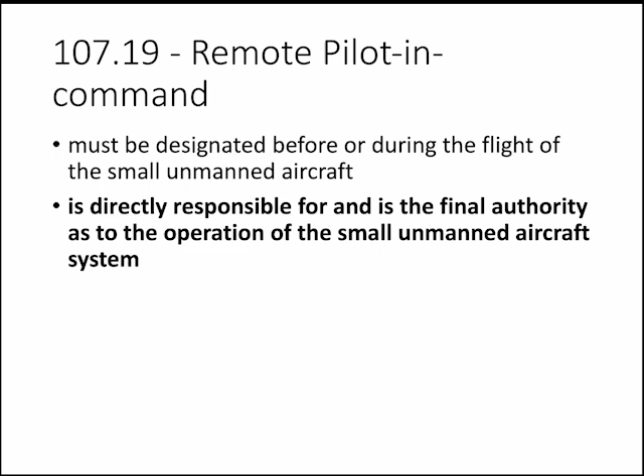So the RPIC doesn't have to be the pilot. There could be a pilot and someone else who is the person who's responsible. But the RPIC is the one who's going to be responsible for everything that happens and makes the final decisions about what to do in the event of any emergencies or anything like that. The RPIC has a number of requirements. You have to meet certain requirements as the RPIC.

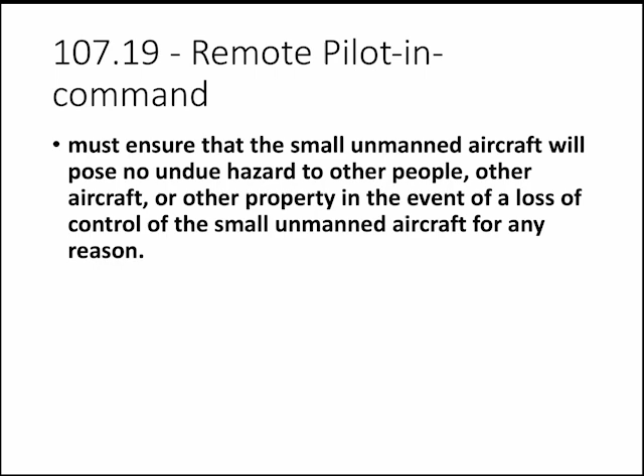Number one, you have to make sure that your drone is not going to pose a hazard to other people, other aircraft, other property. And the way that I think about this is that if the worst happens and your drone falls out of the sky, would it hurt someone or something? And if it would or does, then the remote pilot in command is going to be the one who is responsible for that.

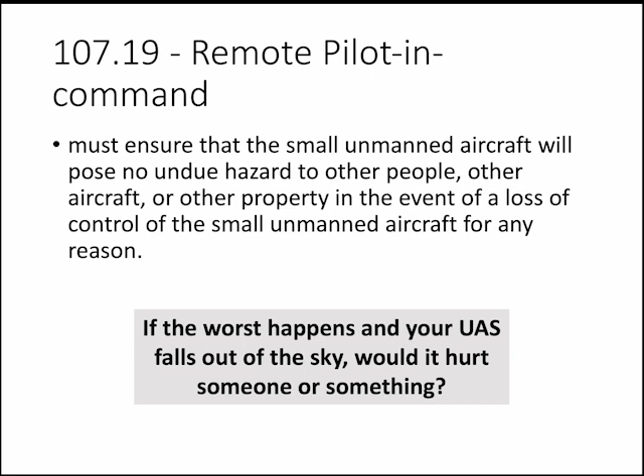The RPIC must have the ability to direct the operations, make sure that the drone is complying with all the regulation. Now, as you may have noticed before, it's actually possible to designate two remote pilots in command for a single mission and for one RPIC to transfer to the other, as long as you can maintain line of sight and there's no loss of control and things like that.

This happens where maybe you're flying over a larger area where maybe it wouldn't allow both pilots to see the airplane in the entire flight. You can transfer the flight to another remote pilot in command as long as you can both see the aircraft when you do the transfer, and then the other remote pilot in command can take over and fly the aircraft maybe farther, or maybe you're taking turns controlling the aircraft, whatever it might be.

So you can have two RPICs and they can transfer as long as you can maintain line of sight from both RPICs at the time of the transfer and there's no loss of control.

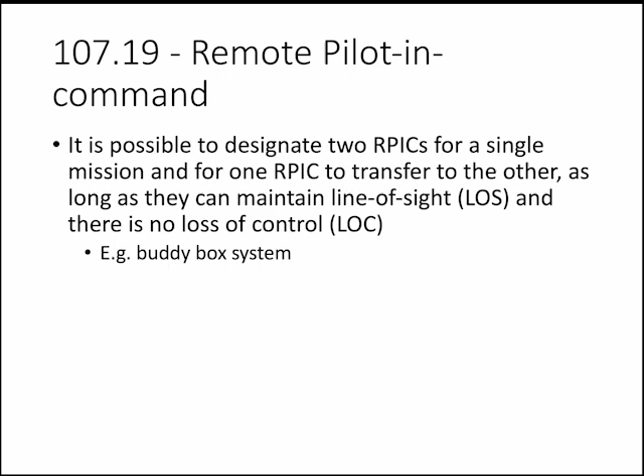The remote pilot in command may deviate from any of the rules and regulations that we've talked about to the extent necessary to meet an emergency. So in an emergency situation, the RPIC basically is the one to decide, hey, we're going to do this, even though maybe technically it's against the rules. This is going to be the safest thing to do in this case. The RPIC is the one who's allowed to make that decision. But of course, that means they're also responsible for anything that happens as a result of that decision.

And the FAA administrator is allowed to require them to complete a report about what happened and why they did what they did. Note that this is only upon request. It doesn't mean that if you deviate from the rules in an emergency, you have to send a report to the administrator. Just if it happens and the administrator requests it, then you have to.

Okay, so that's a lot about the RPIC, the remote pilot in command, a very important position which needs to be specified for every flight that you make. And again, maybe in many cases it'll just be yourself if you're the one flying the drone, but if you're working with several people, then you'll have to designate that.

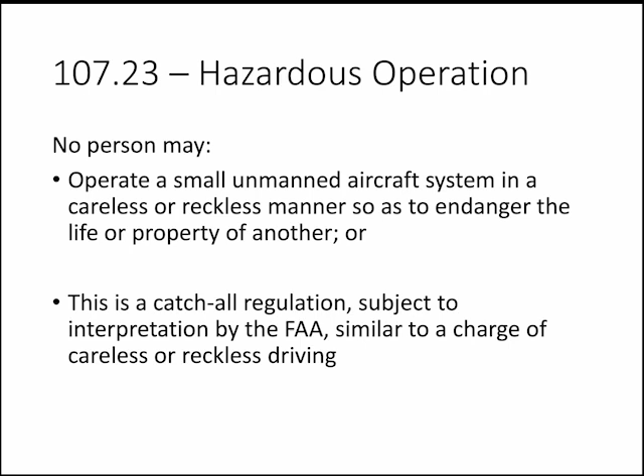Now, just a few general things about remote or UAS, UAV operations. Obviously, you can't operate in a manner which endangers the life or property of another. This is kind of a catch-all regulation.

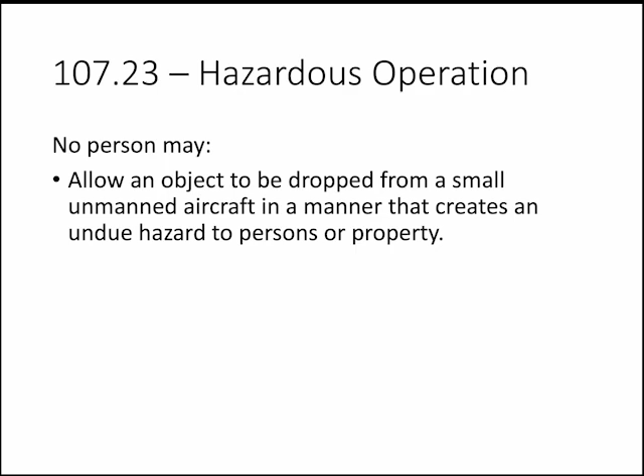You're not allowed to drop an object from a drone if it's done in a manner which creates an undue hazard. And again, this is kind of subject to interpretation. But basically, the FAA is expecting you to use common sense, to use good sense about what situations might be hazardous to other people or property.

You are actually allowed to operate a UAV from a moving vehicle or a waterborne vehicle, if you are in a sparsely populated area, a rural area, and you are not transporting another person's property for hire or compensation. You're not allowed to fly a UAS from a moving aircraft, and you're generally not allowed to fly from a moving vehicle, but if you're in a rural or remote area, a sparsely populated area, then you are allowed to.

And this might be the case where maybe you are flying a drone and you want to move to another location so that you have a better view of the drone. You can do that if you're in this sparsely populated area while the drone is flying.

But again, this is a little bit subject to interpretation because who defines what is sparsely populated? The FAA doesn't have specific numbers of people per square kilometer or anything like that. So just keep in mind, again, use good sense, use good judgment about what constitutes a sparsely populated area.

Alcohol and drugs. So you cannot operate a UAV while under the influence of alcohol or drugs. And the FAA takes this very seriously. Actually, these regulations are the same or similar for manned aircraft. And the legal limit is 0.04 grams per deciliter of alcohol concentration in blood. Or equivalently, you need to be past 8 hours after the consumption of any alcoholic beverage. And obviously not using any drugs.

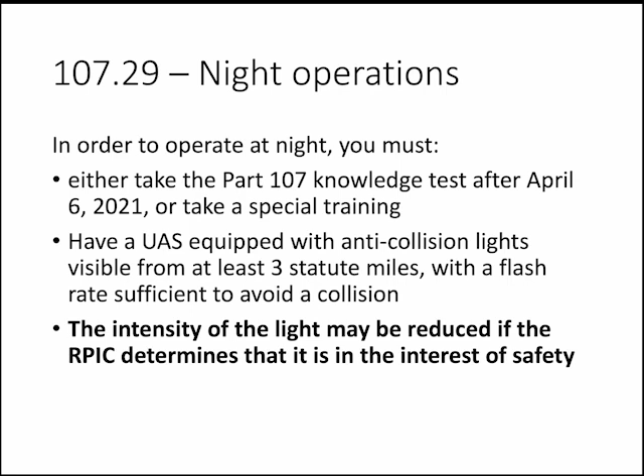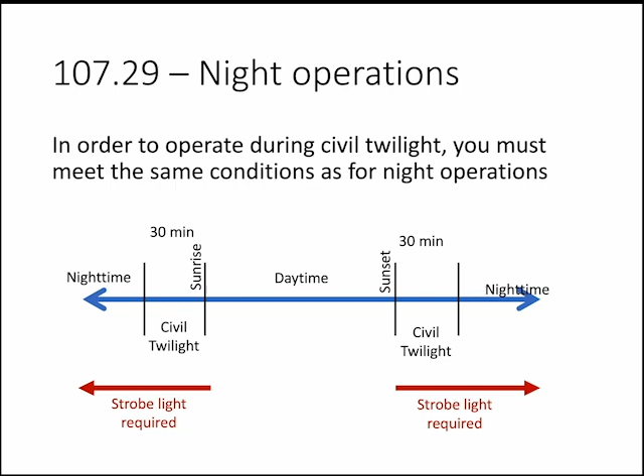Okay, so there's that graph that we looked at, and here is where I'm showing, doesn't matter if it's civil twilight or nighttime, you're going to need those flashing lights that are visible from at least 3 statute miles away during those time periods. All right, so let's talk about visual line of sight.

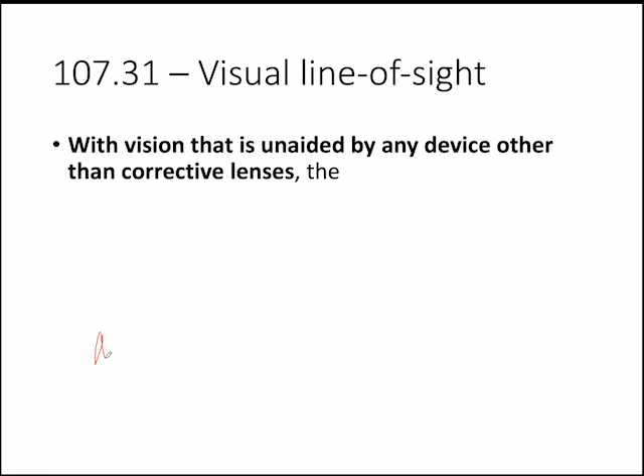When you're operating the unmanned aircraft, you're going to need to be able to maintain visual line of sight. And that means if I am over here operating my drone, this is supposed to be a drawing of me, not a very good artist, I apologize. But here we are, here's my drone. This is supposed to be propellers on the end of the drone. And there's my camera, I'm taking pictures.

So I need to be able to maintain direct visual contact between myself and the drone at all times during my flight. And the only thing that I'm allowed to use to maintain visual line of sight is prescription glasses or prescription contacts that I'm wearing. So binoculars are not allowed, telescopes are not allowed. Anything other than your regular prescription lenses that you wear normally is not allowed.

You must be able to see the drone from where you're flying at all times during the flight. And as we said, in some cases you may move around so that you get a better view of the drone, and that's fine under those specific circumstances, but you have to be able to see the drone. So in other words, let's say this is a hill and I'm flying. If I put my drone over here, now the hill is in the way, and my drawing is getting worse and worse, I see. But anyway, the hill is in the way now. I'm not able to see it.

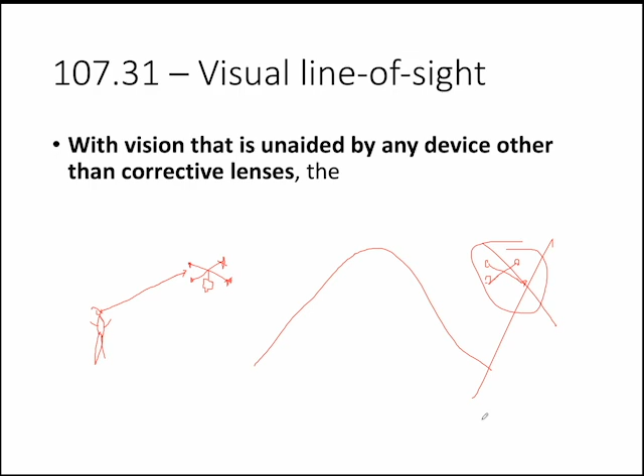So I might be able to walk around to the side of the hill where I could see the drone. And as long as I can maintain visual line of sight during the entire flight, that's okay. But if I was to stand over here and then have the drone over here, that's not okay. So let's draw a circle and a big X. Don't do that. That's violating the visual line of sight regulation.

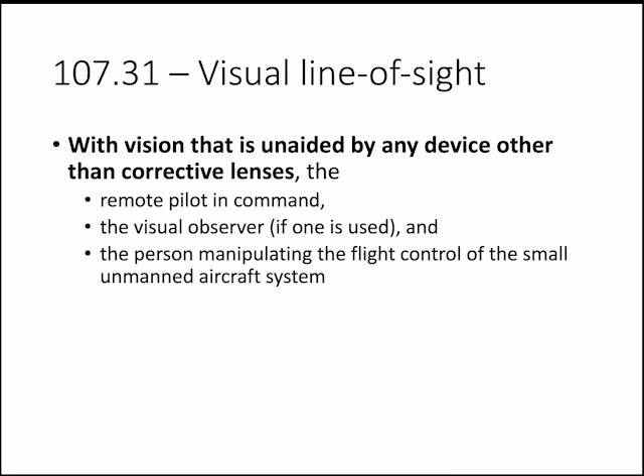And it's not just the remote pilot in command that needs to be able to see the drone. If the person who's actually piloting the drone is different from the RPIC, they also need to be able to see the drone at all times. And if you're using a visual observer, they also need to be able to see the drone at all times, visual line of sight. So you must be able to see the unmanned aircraft throughout the entire flight.

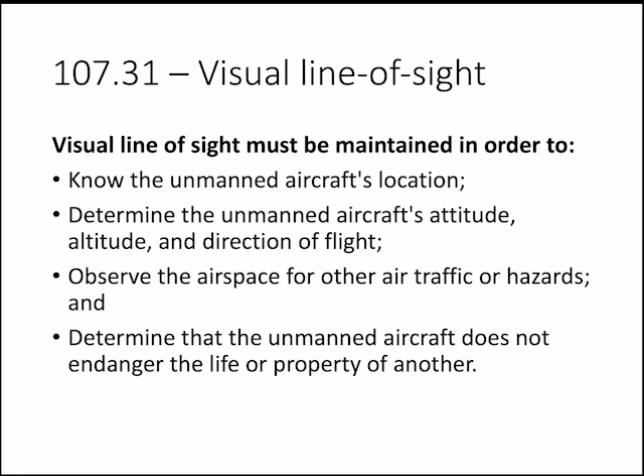And this is required because this is basically a safety thing. The FAA doesn't want you to fly a drone beyond visual line of sight unless you have a special waiver to do that, because you need to know where the aircraft is, if there's any other aircraft around, and make sure that you're not endangering the life or property of another. And what we're going to see is that you're actually not allowed to fly over people. So if you can't see the UAV, you're definitely not going to know if you're flying over people or not. So you must maintain this line of sight contact.

Now there is kind of an exception, which is for first person view. So if you've flown drones before, you might be familiar with this idea of first person view. This is where you're going to wear goggles and you'll be able to see just what is in the drone camera.

And this is a case where you can't see the drone essentially because you've got these goggles on. And so the FAA kind of makes an exception for this, where you can use a visual observer to watch the drone while you have the first person view goggles on. A little bit of a weird situation because it kind of violates the other regulation, but this is basically what the FAA is allowing at this time.

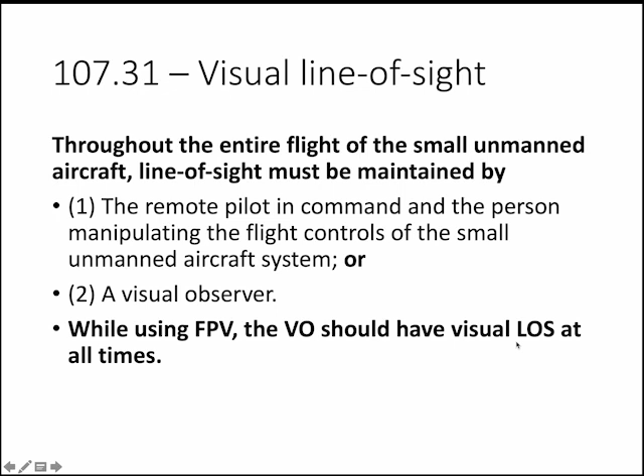So if you're using FPV, you need to have a visual observer who has visual line of sight contact with the drone at all times. And this is an area that's probably going to change in the future, so you'll want to kind of keep up with this. A few more things about these visual observer people.

If you are not so clear on what this is, it's just someone who is helping make sure that everything is safe during a drone flight. So again, this is not you just flying by yourself. This is where you have a team of people and you're making sure, for example, drones are often flown for mapping in cities or in parks.

And in those type of cases, it might be very difficult for the drone pilot to be watching not just the drone, but all the people that are around and cars, and making sure that you're not flying over people or something like that. And so this is where visual observers come in. They can help the pilot watch the drone and then also watch if there are people around that need to be kept away from underneath the drone or something like that.

And so the visual observer and the RPIC and the person who's piloting the drone have to be able to communicate with each other at all times. And so the FAA doesn't count visual observers if you're not within communication. So if you're too far away to hear by talking and you don't have any walkie-talkie or cell phone or something, then that's not good enough.

The remote pilot in command must ensure that the visual observer is able to see the unmanned aircraft. In other words, even the visual observer, even though they're not flying the aircraft, they need to be able to see where it is so they can tell if it's getting above people or something like that. Again, more details. All these regulations have all these details that we go through.

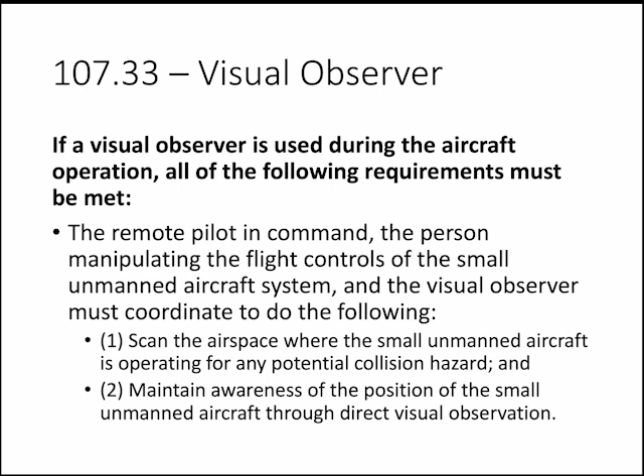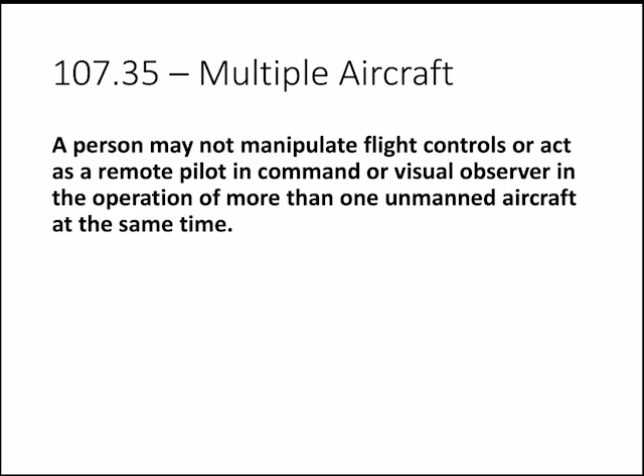Now there's a few additional regulations just about who can fly the drone and what you can and can't do. You may not fly multiple aircraft at once. Now you might be thinking about these drone shows where you see many hundreds and thousands of drones that are flying all at once, and that's a little bit different situation. You'd have to have a special waiver for that.

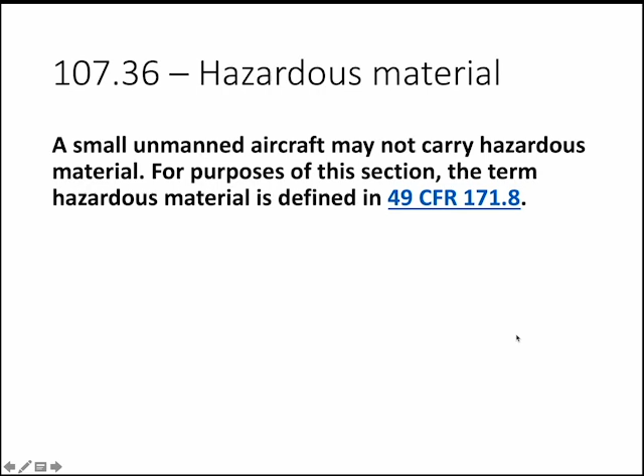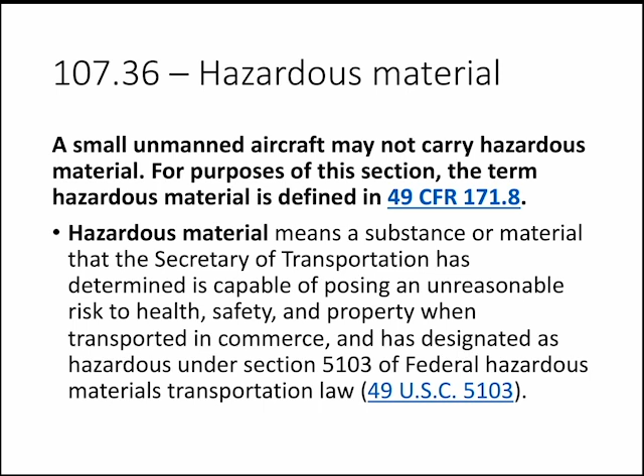You're also not allowed to carry hazardous material, and hazardous material is defined in this section of the CFR. It's basically what you would expect, things like gasoline, dangerous explosive substances. And so basically anything which would normally be classified as hazardous material by the Department of Transportation would also classify as a hazardous material here.

Drones need to yield the right-of-way to all other aircraft, airborne vehicles, and launch and reentry vehicles. Every other aircraft has the right-of-way instead of you. And you are required to stay well clear, don't interfere with those other aircraft or anything like that. And obviously you are not allowed to create a collision hazard, so you have to make sure that you are way far away from any other aircraft in the vicinity.

Okay, so let's take a pause here. We're going to talk about operations over people next, and let's just recap really quickly. So we've got the remote pilot in command, we've got potentially the person who's actually flying the drone, and then potentially one or more visual observers. Those visual observers, the remote pilot in command, and the pilot must all maintain visual line of sight.

You must give the right of way to other aircraft. You must not operate under the influence of alcohol or drugs, and you must not carry hazardous materials. So these are the basic regulations for the operator of the aircraft and the remote pilot in command.

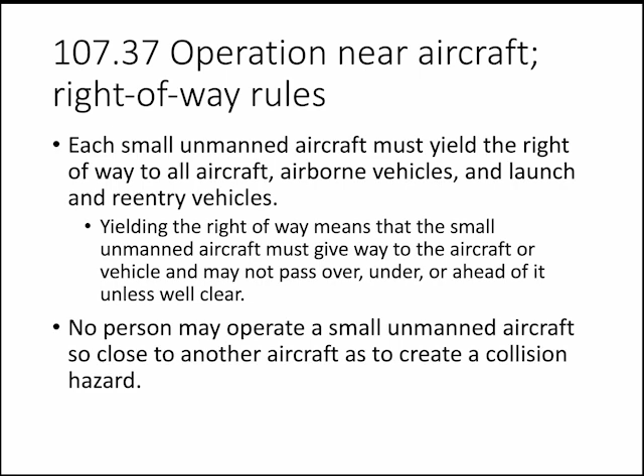FAA regulation in the United States is that no person may operate a small unmanned aircraft over a human being. You're not allowed to fly your drone over people, this is for Part 107 activities, unless that human being is directly participating in the operation of the small unmanned aircraft. So anyone who's on your team, anyone who is involved in the flight, is allowed to be underneath the aircraft. And in fact, some people will actually have someone walk around directly underneath the aircraft to ensure that nobody else is able to do that if there are people that are somewhat close in the area.

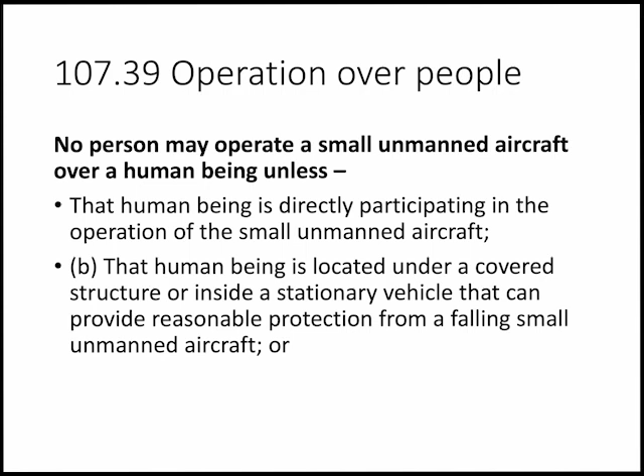There are a few exceptions: unless the human being is located under a covered structure, i.e. in a building, or inside of a stationary vehicle. Note that the vehicle must be stationary, which can provide reasonable protection from a falling drone. Moving vehicles are not included in this, you'll notice, and actually operations are also not generally permitted over moving vehicles.

There's one other possible caveat, and that is that if you have a drone or an operation which meets the requirement of one of the categories in Subpart D, and we're going to talk about Subpart D a lot more later on, then you can also operate over people, but not unless.

So the basic regulation is you can't operate over a human being, and what does that mean, over a human being? The FAA doesn't really specify. So is 5 feet away good enough? Is 20 feet away good enough? How close is too close? And the FAA leaves this up to you, again, as the remote pilot in command or as the pilot. You're required to use good sense.

And again, the criteria here is: if the drone loses power and falls out of the sky, will it hit someone? And if you need to have a larger area to make sure that that drone doesn't hit anyone coming down, then that's what you need to do. The FAA expects you to use good sense when you're thinking about how close or how far away a drone should be from people that are not part of the mission.

So this is, again, a little bit of an ambiguous area, but if a drone falls and collides with someone, then that's really going to be a problem with the FAA. And it actually requires filing a report, not just with the FAA, but also with the National Transportation Safety Board. So lots more details about that to come as well.

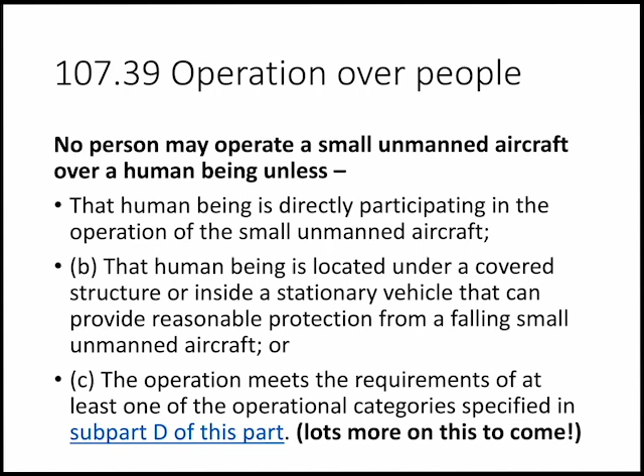Okay, so let's take a couple example questions about this. A farmer is using a drone to inspect livestock while riding in a tractor, and a farm hand drives the tractor through an open field. So the farmer is riding in a tractor. He's not driving the tractor, but he's riding on the tractor. Is this operation legal under Part 107?

And the answer is yes, as long as the UAS is operated safely and the farmer is Part 107 certified. So he's inspecting livestock. Number one, he's not flying just for fun, so he needs Part 107. And as long as he's flying safely, they're in an open, sparsely populated area. That means the farmer is allowed to operate his aircraft from a moving vehicle. And so, yes, this operation is permitted.

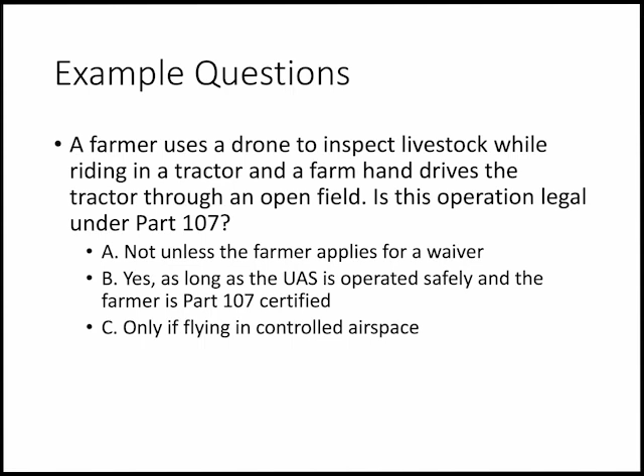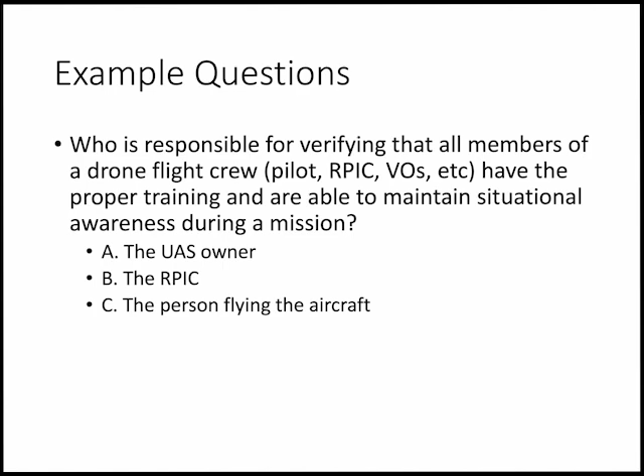Who is responsible for verifying that all members of a drone flight crew, pilot, RPIC, VOs, etc., VO means visual observer, have the proper training and are able to maintain situational awareness during a mission? Who is responsible for anything? And you should say the RPIC, Remote Pilot in Command, is responsible for everything during a drone flight. And so B, the RPIC.

What is the legal blood alcohol concentration for operating a UAS? It's 0.04 grams per deciliter. How many hours must one wait to fly a UAS after consuming any amount of alcohol? Is it 1 hour? Is it until you feel sober? It's actually C, 8 hours. 8 hours after consuming any alcohol before you're allowed to conduct Part 107 operations.

A visual observer stands directly underneath the UAS to keep others from doing so. Is this legal? And the answer, yes it is. Because the VO is part of the mission crew, they are allowed to stand underneath the UAS, and in this case, to keep others from doing so.